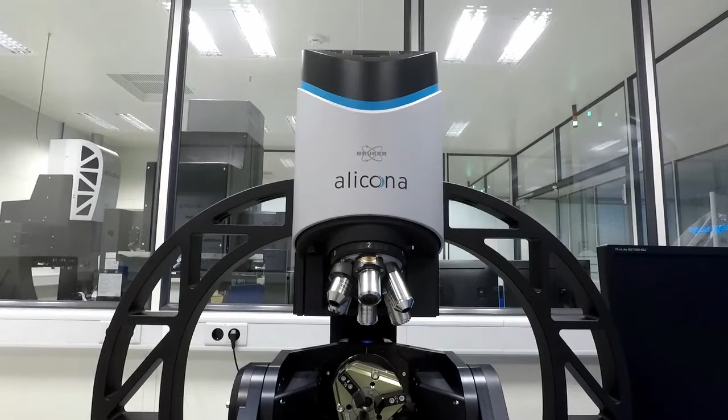The advanced Real 3D unit is also black now, and what we see here for the first time is our new pneumatic three jaw chuck system that we are providing with the unit in the future.

Removing the part, I'm in the middle of the application work, so it's time to hand over to Martina again. Thank you, Urban. For the application, I will show you two examples.

The first example is this cylindrical part, and the second example will be a live demonstration of the hole measurement by using the Infinite Focus G5 Plus.

Back to the first example. This sample provides two different cylinders with two different diameters and a cone at the top.

By using the Infinite Focus G5, the measurement strategy would be as following: a horizontal clamping and a 360-degree measurement by using the advanced Real 3D rotation unit. This would need approximately 20 minutes if we consider the parameters of interest like diameter or the concentricity of the geometries.

By using the Infinite Focus G5 Plus, the clamping is vertical, and within one measurement I can measure the three different geometries by using the vertical focus probing, with a measurement time of about 3 minutes.

The result would look like this, and by using this data set I can measure the explained parameters like diameter and roundness with a higher accuracy than with the advanced Real 3D rotation unit and the Infinite Focus G5.

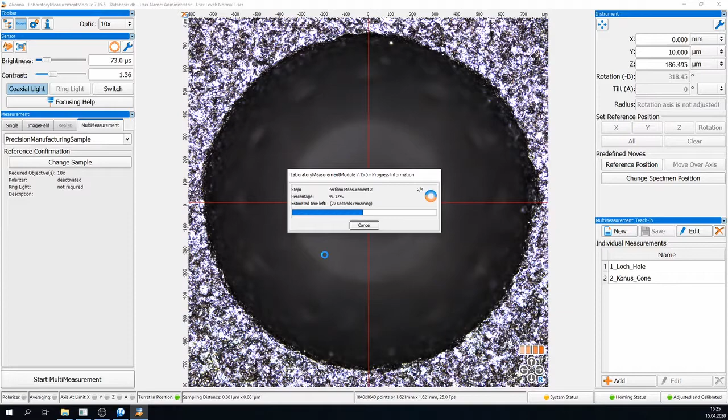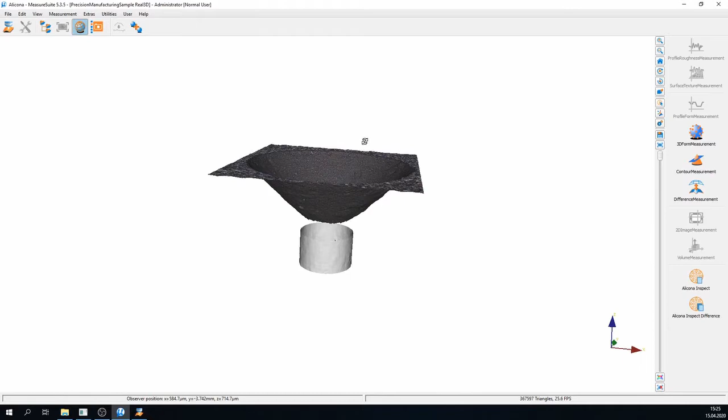As you can see, the live measurement is already finished, and if we compare the measurement strategy and time with the Infinite Focus G5, we can say that measurement would have needed at least a few minutes, what we could fulfill here in a few seconds, because the measurement would have been carried out at a certain angle or by using a real 3D measurement.

But I can see that Urban is already waiting at the Infinite Focus SL to proceed with the next agenda point. We are still in measurement room 1, and now we are focusing on the next agenda point.

The next agenda point deals with the possibility of automation of Bruker Alicona products, and we will also focus on a dedicated application we've been dealing with for several months, which this setup is able to solve perfectly.

But let me tell you something about the product itself. I'm next to the Infinite Focus SL unit. It has a more compact design, and the smaller sensor compared to the G5 is designed for production near measurements. It also has a patented ring light system and an XY travel range of 50 by 50 millimeters.

As I said, the product has a more compact design, so I'd like to focus on the possibility that you are able to put this system into a luggage set. You're able to purchase a luggage set with the Infinite Focus SL, and if you have more global facilities, you're able to pack it and travel with it globally, all around the world.

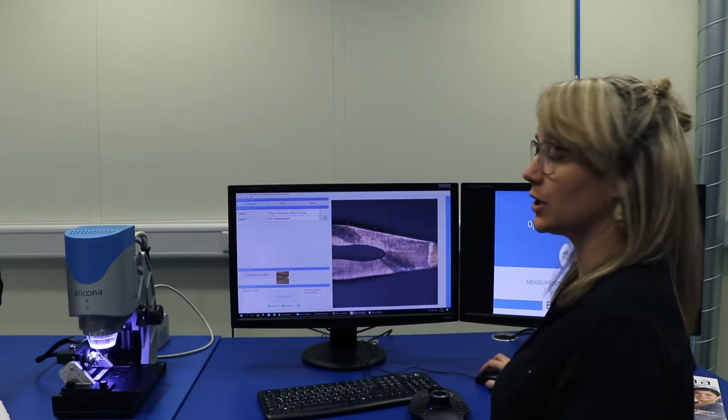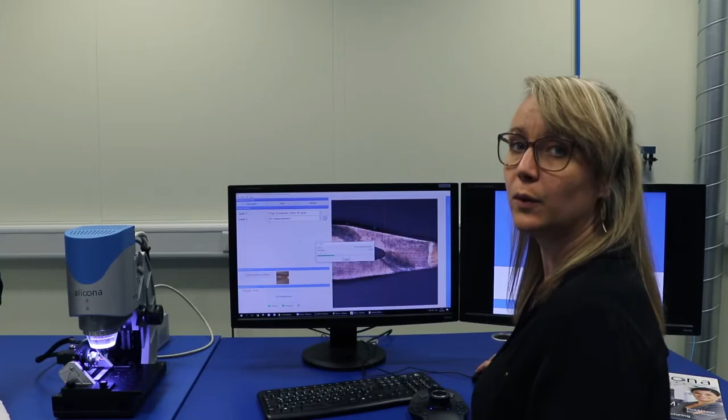To start an automation, it is only necessary to focus on a defined reference position, confirm this position, and start the measurement. For a speed up, I already prepared a measurement report and I will go through it with you in detail now. Let's start with the presentation of the measurement report.

But first of all, I would like to explain the application a little bit more in detail. The plug connections we are now speaking about are this part, which are already part of a semiconductor plate.

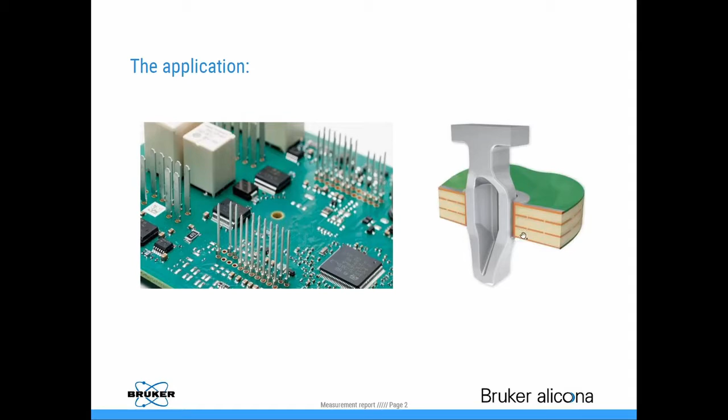The plug connection, which we are already measuring right now, is cold welded in a semiconductor plate as soon as the plug connection is press fitted into the plate itself. So the area of interest is this zone here, which is called press fit zone.

The measurement setup we are using to solve this application is the Infinite Focus SL with the Real 3D Rotation Unit G2. This enables us to make a 360-degree measurement of the overall plug connection.

The evaluation itself is done section based on two different positions: section number 2, which is the press fit zone, and section number 1, which is the tip of the plug connection itself.

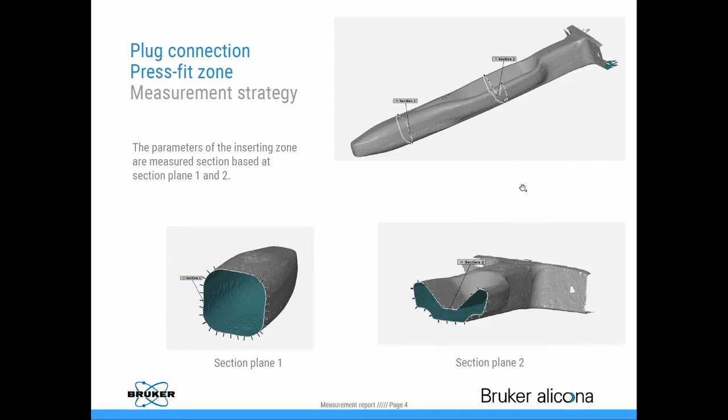At section number 1, the tip of the pin, parameters like the width and the thickness, as well as the radii, are interesting and part of the evaluation.

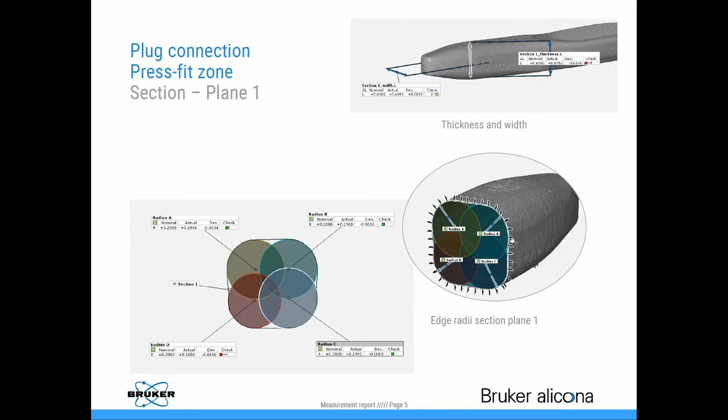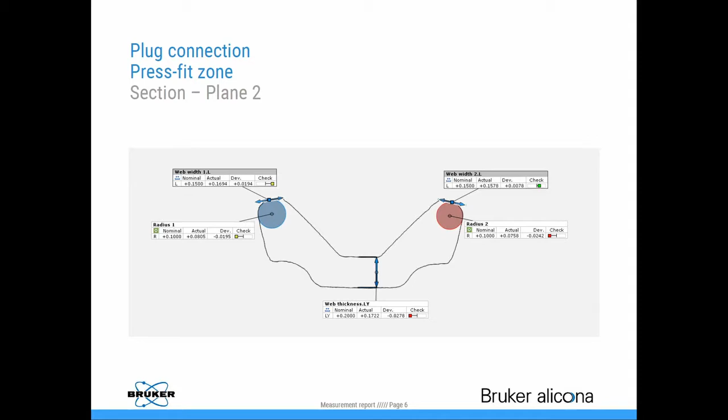At section number 2, the press fit zone itself, the web width, the web thickness, and the radii are measured by using Alicona Inspect Professional and the Automation Manager.

There are very different kinds of plug connections existing. Here you can see 3 already measured variants, which is the Elo-Pin, the Multispring, and the Vario-Pin.

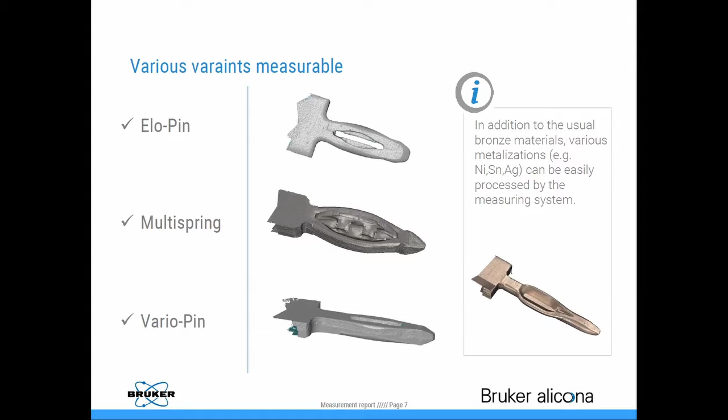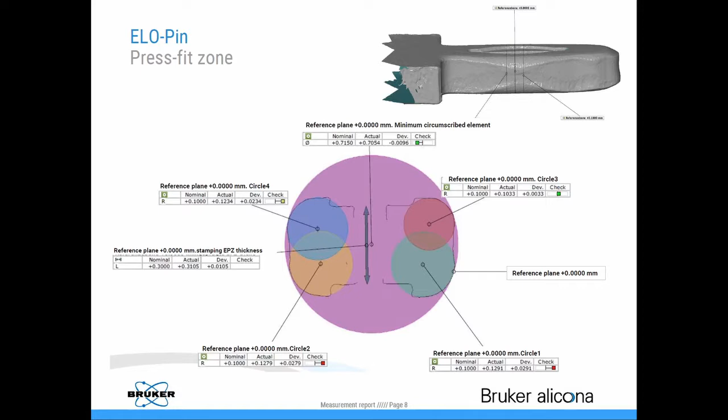A possible evaluation of these pins you can see here. This is a specific evaluation for the Elo-Pin. This one is for the Multispring, and here you can see the Vario-Pin.

Summarizing everything, the Infinite Focus SL is capable of measuring all parameters of interest. By using the Automation Manager, we are able to minimize the user influence to the minimum, and all measurements reach a high repeatability.

Now let's go to measurement room number 2, where Urban is already waiting for us to continue with the next agenda point, the micro-CMM.

Welcome from the next measurement room. I'm standing next to our flagship of the product family, the micro-CMM. The system was presented at the Control Show 2018 already.

Let me summarize the main 3 features that we are providing with the hardware of the micro-CMM. Point 1, we have a totally new developed optics unit that is supporting and featuring our new technology Smart Flash Generation 2. This ensures we can measure smooth surfaces and even transparent parts.

Point 2, the Real 3D unit. The Real 3D unit upgrades the system from a 3-axis to a 5-axis system in a very accurate way. And the third major point is the massive granite setup.

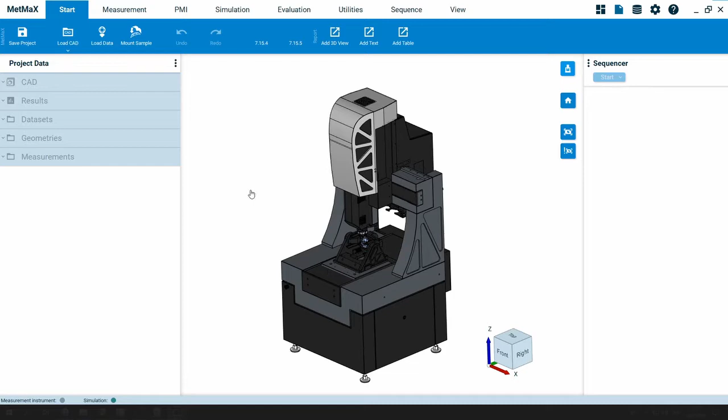For this, I will load the CAD model and align it to my virtual clamping system. The part is now clamped into my virtual clamping system, as you can see here, and we will focus now on the part itself.

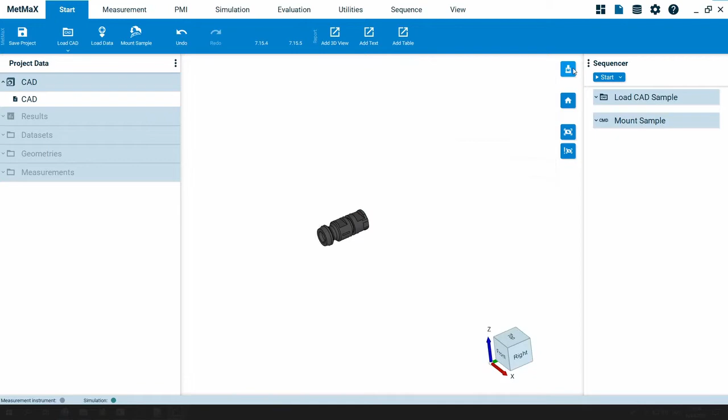With the software, we can work on two different scenarios: with a CAD model where we've already defined PMIs, PMI meaning product manufacturing information, or in this case, we will work on a CAD model without defined PMIs.

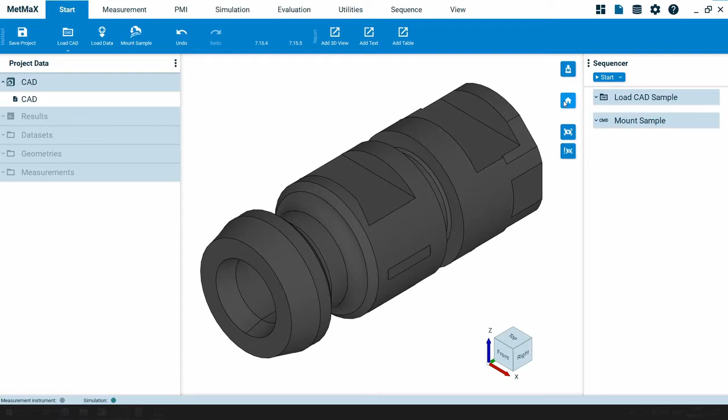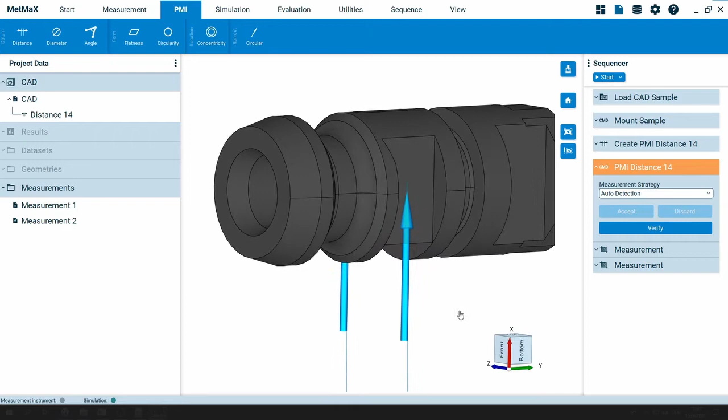For this, let's start with the first PMI. This is a distance. I click on the two areas defining the distance, and the implemented expert knowledge suggests a certain measurement strategy, which is a vertical focus probing measurement on the two sides. Now by clicking on verify, the measurement and the evaluation of the distance will be carried out automatically.

The measurement is now finished, and we can already see here the measured vertical focus probing data set. And when I zoom out a little bit, you can see here the result.

What I missed to say in the beginning is the first value indicates the nominal value according to the CAD model with tolerances, and these tolerances are according to general tolerances ISO 2768. And here finally we have in green the measured value of this distance, meaning the measured distance is within the defined tolerances.

Let's continue with the next PMI.

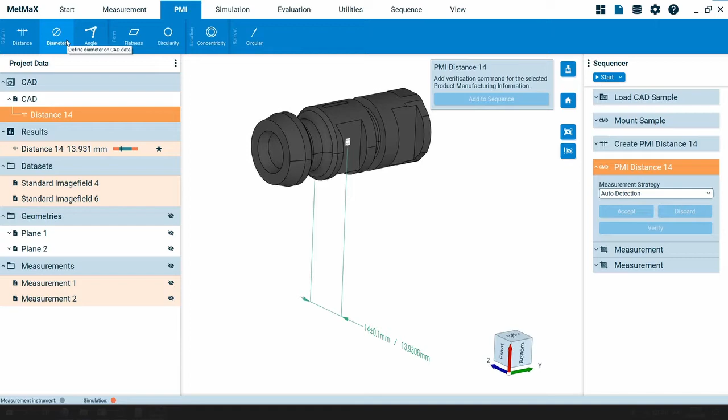The next PMI is a diameter. We define this cylinder as diameter, add it to the sequencer, and in this case we will change the suggested measurement strategy from a vertical focus probing measurement to a focus variation measurement.

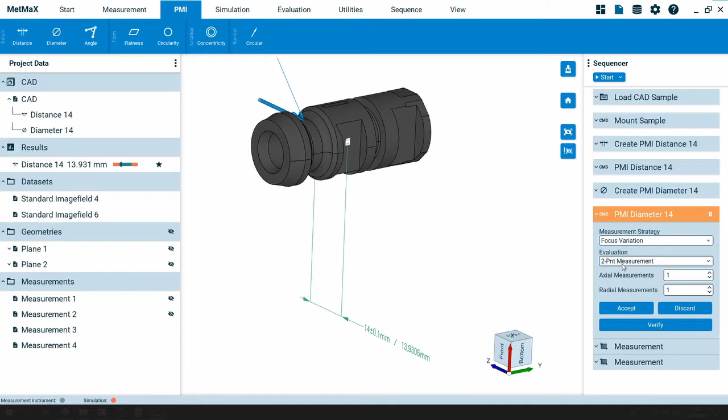Now it would be a focus variation measurement on 2 points. You can see here the arrows. We will also change the radial measurements to 2, and by clicking on accept, you can see now the finally defined measurement parameters for the PMI diameter 14.

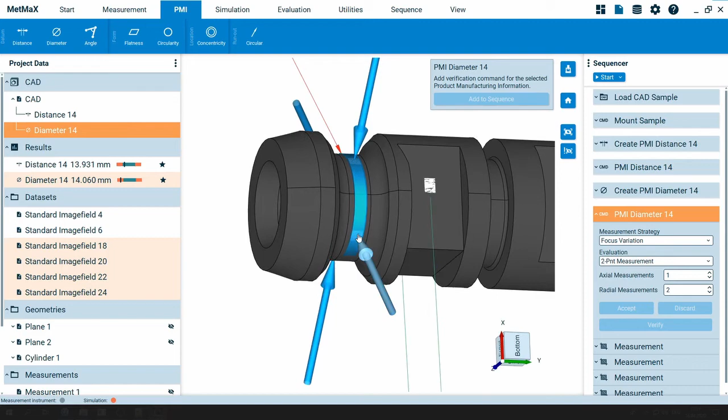I click on verify and the measurement and evaluation is started again. The measurement is finished. When I zoom in a little bit, you can see here in blue the fitted geometry, which is a cylinder, and the focus variation data sets around the cylinder itself. In this case, the measured diameter is within tolerances and therefore shown in green.

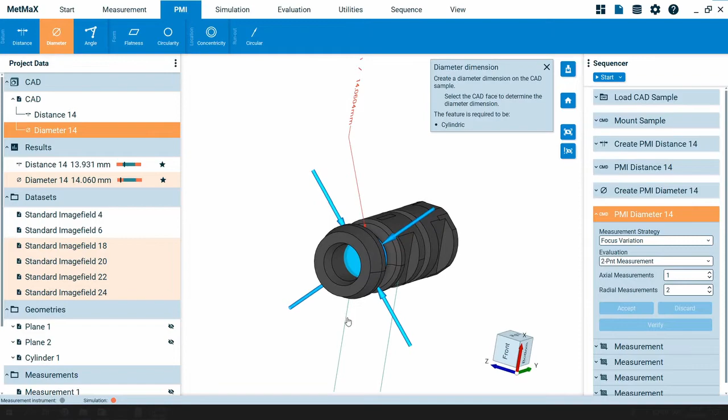The last feature we will measure is again a diameter, but here on the inner side of the part, and we define it as a vertical focus probing measurement on 2 points as suggested by the software itself.

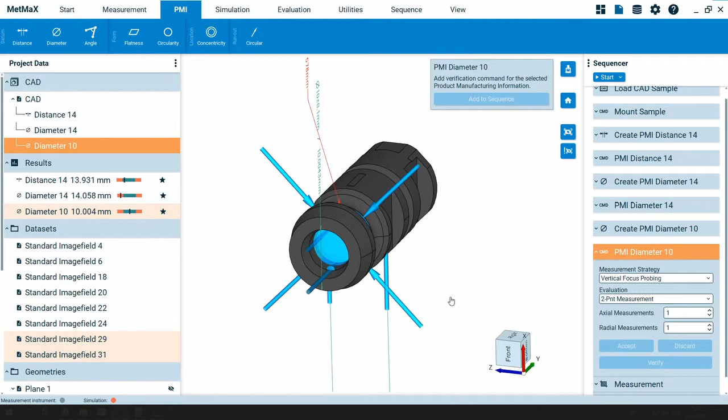The measurement of the PMI diameter 10 is now finished, and we can see in the overview that this parameter is also within tolerances and therefore displayed in green.

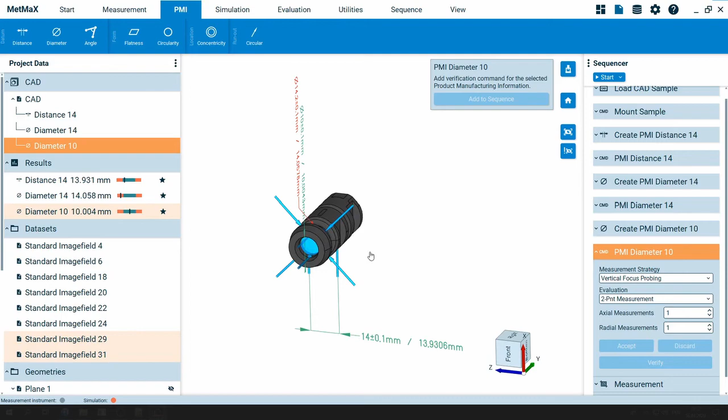Before continuing with the reporting functionality, I would like to mention a very big feature: since the software uses the virtual instrument as well as the CAD file, MetMaX is able to detect collisions. To show you the collision detection, I will make a single measurement where I'm sure a collision will happen.

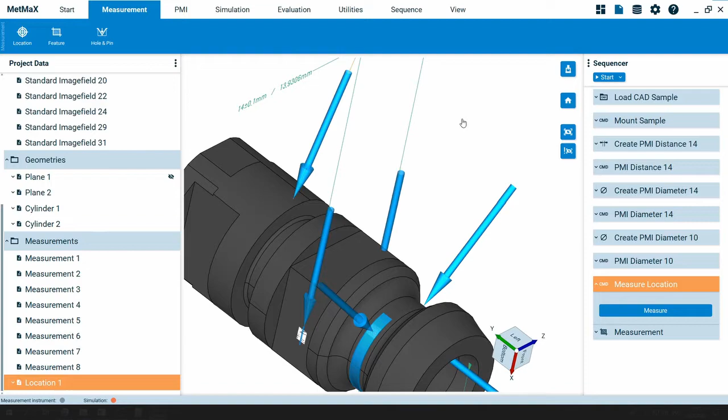You can see the yellow warning indicating that a collision was detected. This will of course show up the first time when you define a PMI or a single measurement in the sequencer. Now we will have a look at the collision itself.

For this we click on simulation, and when we start the detection, the overall process within the sequencer will be simulated and we will see the collision and the affected hardware. We see now where the collision happens.

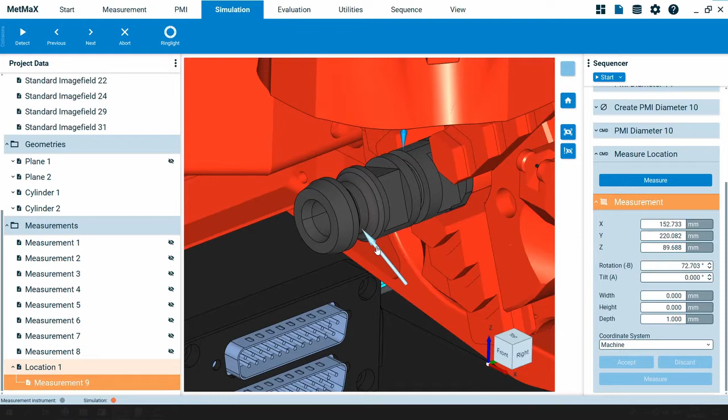If we zoom out a little bit, you see that the ring light, the objective, and the clamping system are displayed in red. Here the collision occurs, and we will resolve it easily by changing the tilt angle of the microCMM Real 3D rotation unit.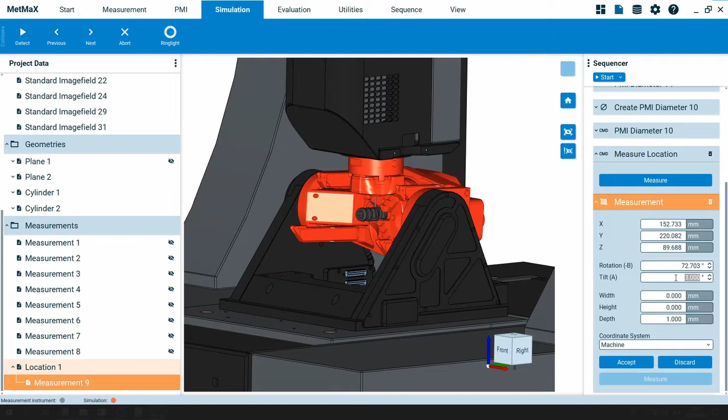With the mouse wheel, I can easily change the tilt angle to a certain value where the collision is resolved. In our case, we will choose an angle of 22 degrees.

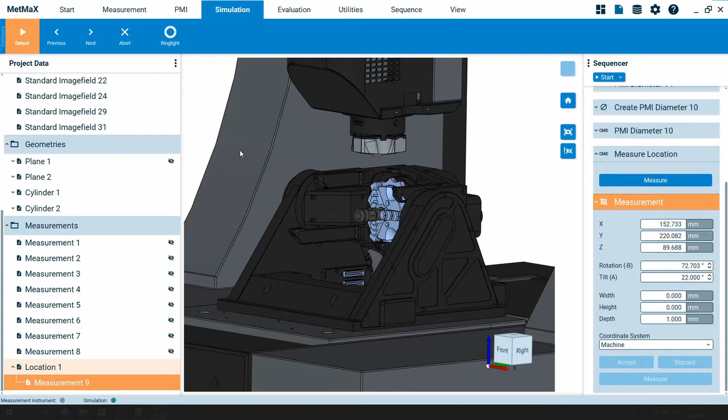I accept it, and by pressing detect, we will simulate the overall sequencer again and check if a collision is happening. And now here you can see no collision was detected.

So now, finally, we would like to have a nice report. The reporting functionality in MetMaX is done with Microsoft Word.

We will now add a nice 3D view of the CAD model with the PMIs to our report by clicking on Start, Add 3D View. Microsoft Word automatically starts, and we see here the defined picture in our report. Of course, the PMIs and the measured values are also of interest, so we add a table.

And this is now the final report, which would look like this when we start this overall sequence again.

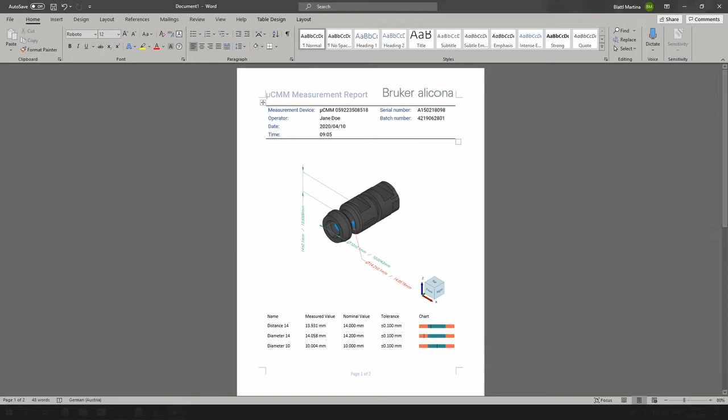We are now at the end of this project, and we could save this project and use it at any time for automation. But before we end the MetMaX session, I want to show you how a CAD file looks like with already defined PMIs, as I mentioned in the beginning.

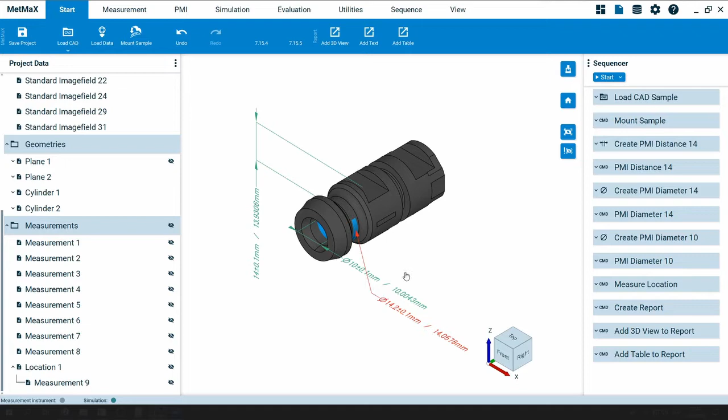I will go to the library and load a project, a CAD file already containing PMIs. This part is now containing the PMIs, so you can see here how a CAD file can look when you have already defined them.